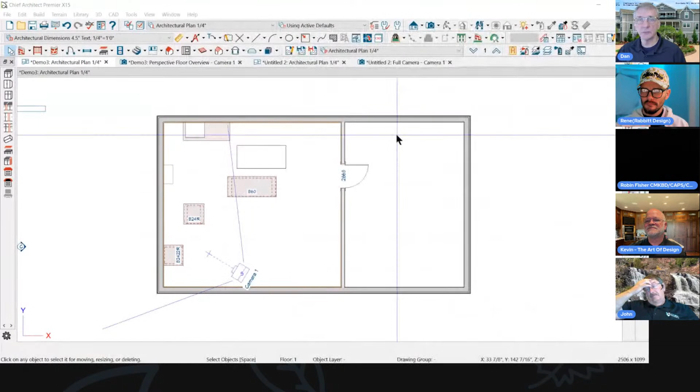So center cabinet hardware on doors, that's like just a couple new buttons. When you go into a 3D model, or you go into your cabinets and you click on the door drawer option, you'll see some new options here. One of them is centered - you've got centered up and down, centered back and forth. It's some new buttons to make placing knobs a little bit easier. So if you want those handles in the middle of your doors and drawers, just click those buttons. It's such a lovely aesthetic too.

Seriously, you guys, this to me is just kind of a silly button. But if you're designing, you already have these adjusted in your plan views. So to me, I would already have - I had to change my defaults to get that to work because it wouldn't work on my system.

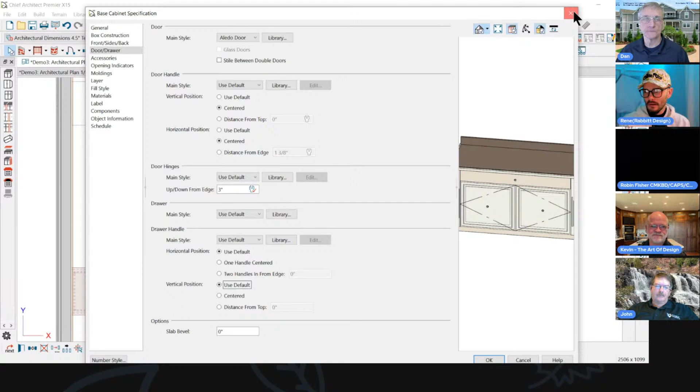Sure, okay, so there is a glitch and it's active and they know about it. There's some instances where the door handle offsets aren't working. In those cases, you'd go to your front, sides, back, and go to the door that's not working for you, and then go to specify under appliance door drawer.

One more one down, next one down, yeah. And now you would edit your offset here. So if you're having trouble with an offset, this one will work, if for some reason it's not working in the other general panel. Okay, cool, you've got 2 places to do it.

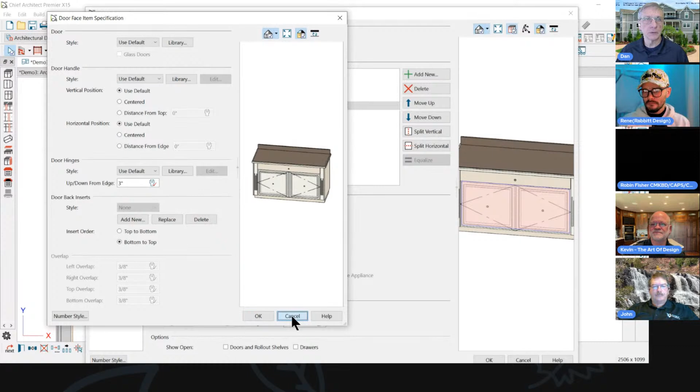And you could also set that in one only - this one does it for an individual component, right, it won't do it for the whole cabinet. Where the other one, going to door and drawer, will change everything on that cabinet. Got it, exactly, all right.

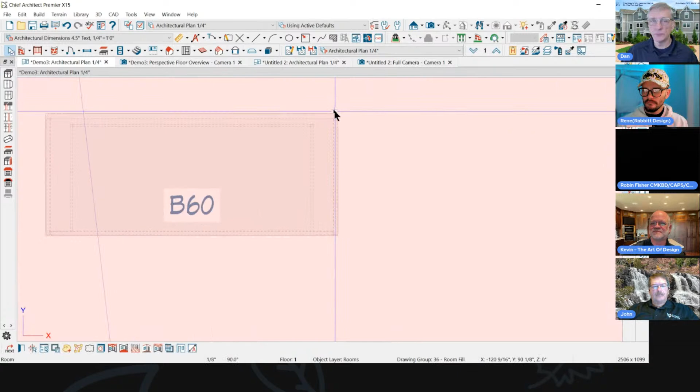Cabinet end panel display in view, plan view. So I put an end panel on this cabinet and it is displaying - it's also displaying the drawer. And that's set up in your default settings: when you click on the default setting wrench, go to general cabinet, and we can turn these buttons on right here.

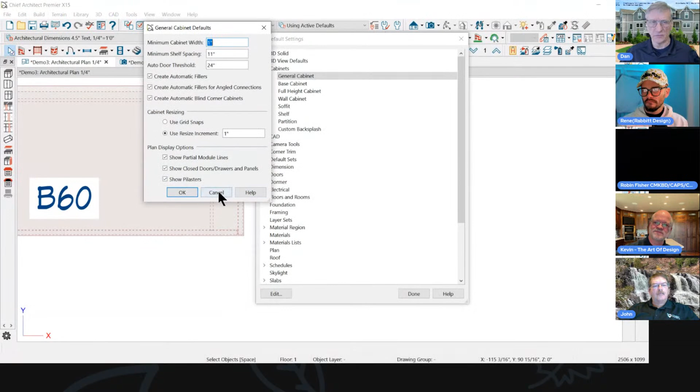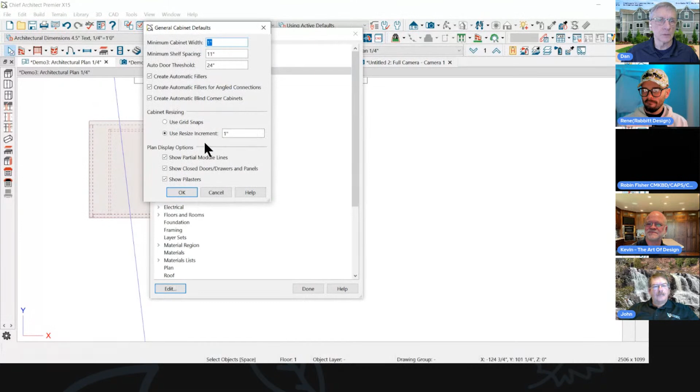Now, I played with those for quite a bit and it's like, this isn't working very well. What if I don't want to show my drawer here, I just want to show the panels on the sides of the cabinets? You have to uncheck the first one - you can't keep all 3 of them checked. I tried that, man, I tried it, and maybe it'll work today. I was showing it to my contractor, and he said there's so many lines on the drawing that it becomes confusing.

So, this is where it is. This didn't change anything. You have to look at this to be able to make sure all those little details that you need to show are on the cabinets. It's not something that you would necessarily share with a contractor, but you would share it with a cabinet maker.

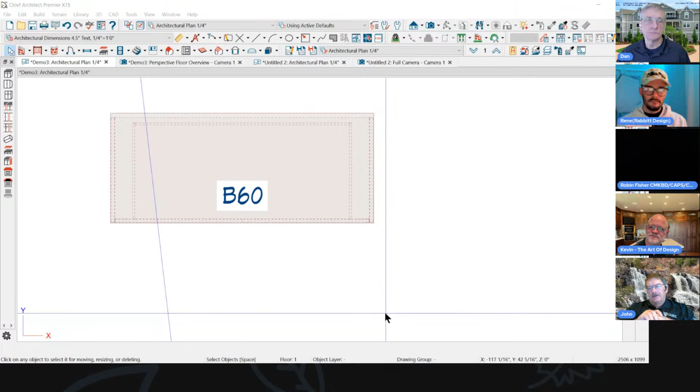But those aren't exactly the way you might make the cabinet, so is that really what you would show? It's showing that there's going to be something artificial there that's not really part of the cabinet. Well, I would do those notes on an elevation, because you're not giving your cabinet maker a set of floor plans. You're giving your cabinet maker all the details.

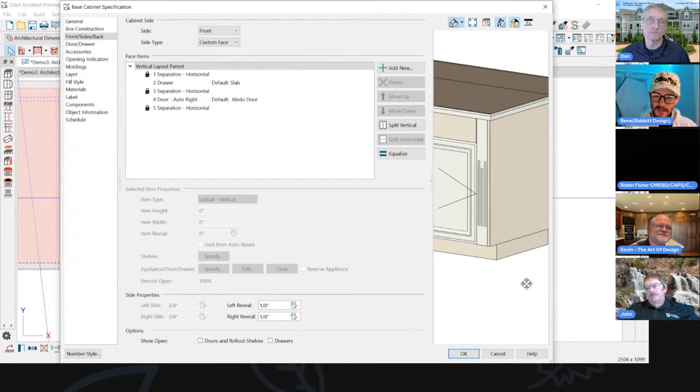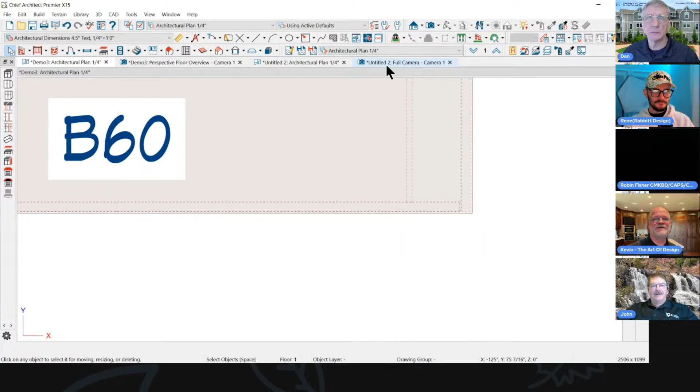Now, the other thing that wasn't working for me: when I put a pilaster on the cabinet and turned on show pilasters in the plan, this is what it shows. I can see it here, but it's covered up with whatever this front panel is. That'd be the door or drawer, I believe.

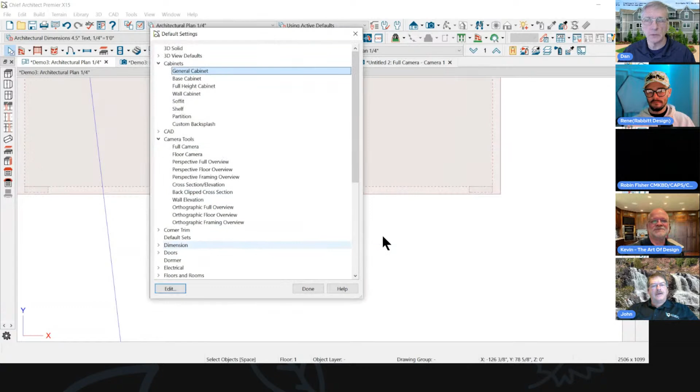I'm just bringing it up because it's on the list and I couldn't get it to work. That was under cabinets, under general. Even when I uncheck that one, now it shows the pilasters but doesn't show the side panels. Are the drawers in their own layer? I don't remember, I'm looking. I think that's a vertical, for when you're in elevation mode, but let me check if that's there.

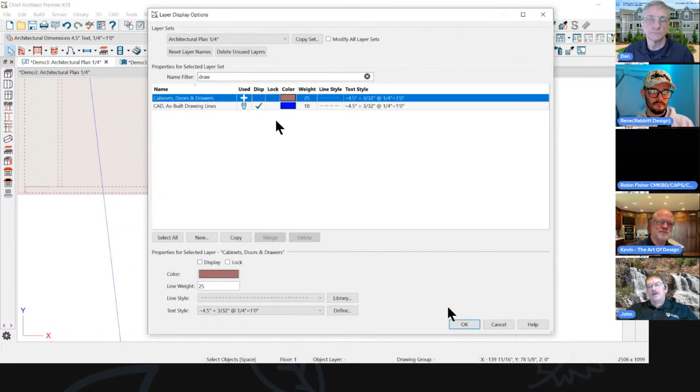I have to turn everything on first, right? Okay, I'll try one more thing and then we're going to move on, because I don't think this is something we need to spend a lot of time on. This kind of detail is fine if your cabinet maker likes it, but after a while it's too much information on your floor plans. So when I turned drawers off in the layers, it turned off the side panels too. Yes, it turns off everything.

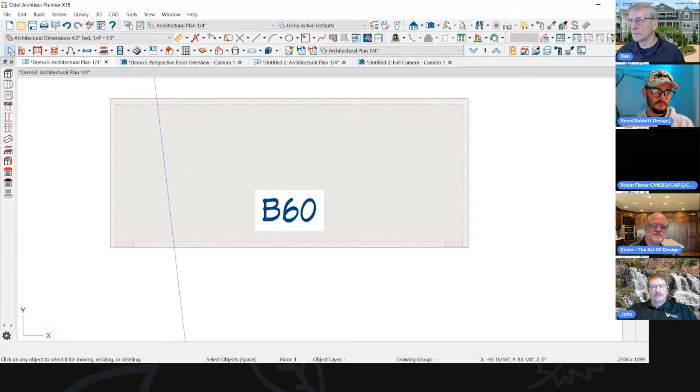Set pilasters is always present - I have no idea what that's for. Convert cabinet moldings to molding polylines: when you click on a cabinet, you have a new icon down here. So if you had put moldings on your cabinet that you had made and you want to turn that into a library object, you click this and it's going to allow you to do that.

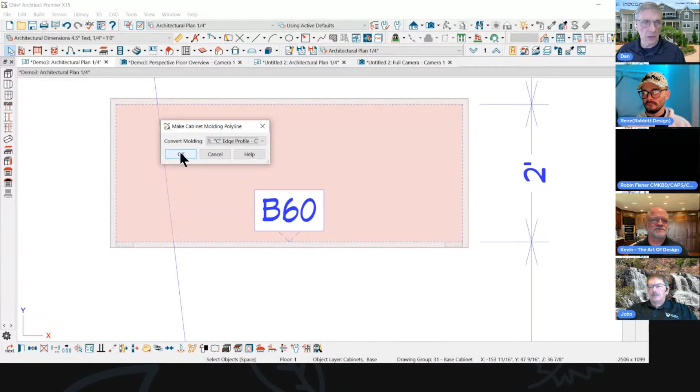It's really nice to be able to bring it around the side of something that might not exist, or to be able to move it. Rene, here's a question for you, I was showing this the other day to somebody - would you, I think it's kind of a neat idea, especially when you want to run it around the side of something or pull it a little bit farther so it finishes a corner detail up.

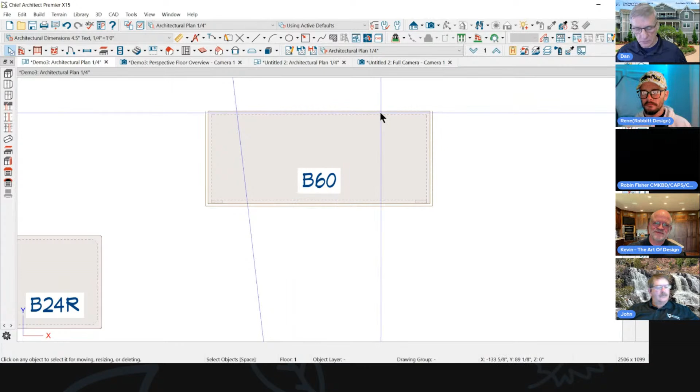Bringing it around the room, you would just change the room molding, unless you're only putting that on one. This is the molding I put on the countertop here. So when I click that button, it displayed the molding itself on the cabinet. I was using it for toe kick and baseboards, and I definitely find it very useful - I use it a lot. That one I like, yeah, that's a good one. You have control over if you want it on there or not now.

So it's a molding polyline, just like any other molding polyline that's attached to the cabinet, or in this case, the countertop. So it does. I like it. That works pretty well.

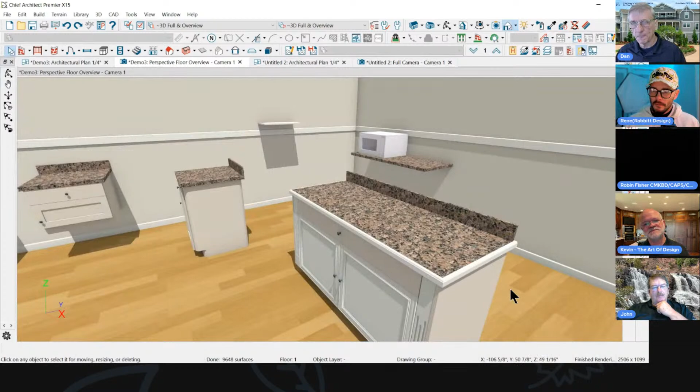So that's, you know, in this case, I'm seeing that molding going around this particular item. Robin, I'll give you a perfect use case for it. I've got a refrigerator built into a cabinet with a custom looking vent made to look like its real life counterpart. If you set a flat molding above that and set your molding to offset for any door items, for that particular item it's going to offset to that vent I created instead of offsetting just to the front face.

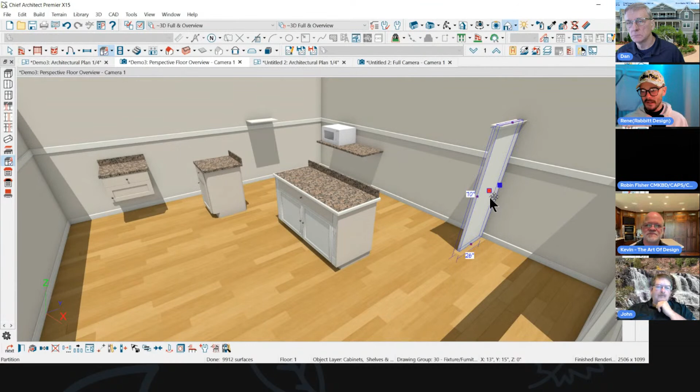So then I convert it, adjust it, fix it. There we go. It's also nice, like if you're going to continue crown molding over a certain part of a room but not run it everywhere, you can detach it and turn it into a polyline. You can drag it to the wall, right? I'll also say it's a lot easier to use in 3D.

Yes, which it is. I do a lot of 3D design now. Yeah, I started doing that, Rene.

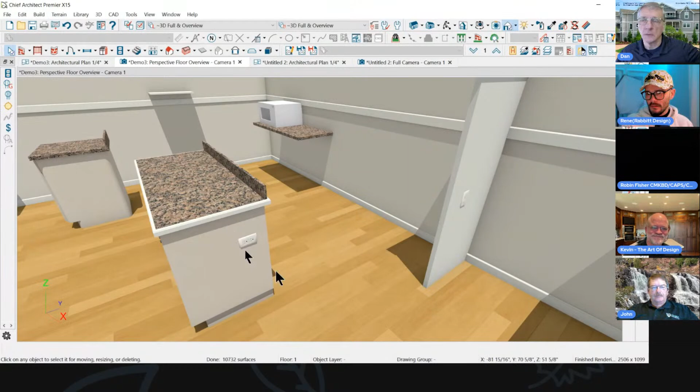I got a trick for you, Dan. Rene guru, you see that outlet right there? Which one, that right there that you just placed? Yep, this is why I love that we have symbol modification in the object itself. Open that up. Oops, wrong one. See how round that is? How round that cover plate is?

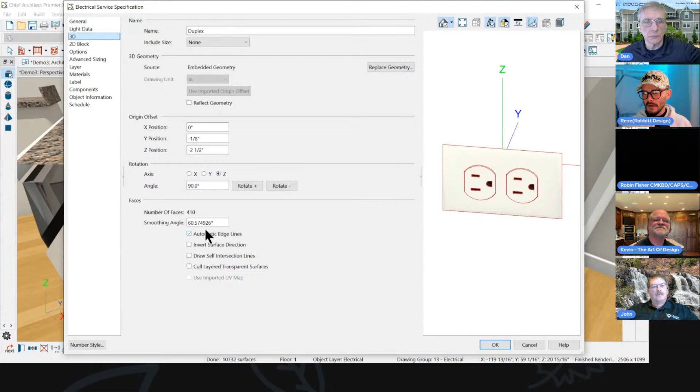Go ahead and get to your 3D panel and set your smoothing angle to like 12, down at the bottom where it says 60. See, right now it says 60 under smoothing angle. Oh okay, thank you, the last input box. Change that. Yeah, there we go, and it just beveled it. Now press OK. Bam.

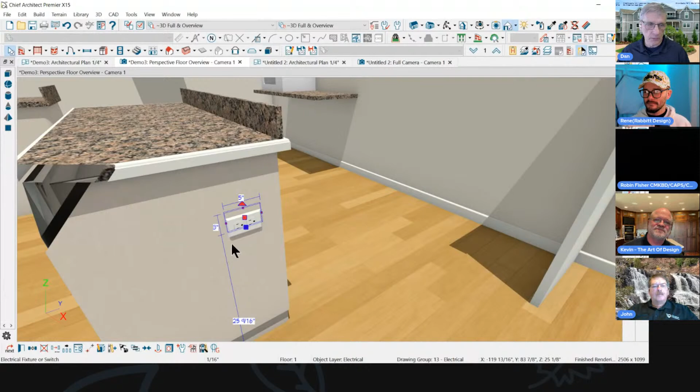So easy. We didn't have to go open the symbol dialog and change the 3D symbol. It's all part of the whole object now. Of course, something's a little bit off here. When I rotated it, it's not quite where it should be, but let's not get into that right now.

So again, the new features, we can add these into partitions, and then we can also in our partitions, let's see, what is that? Select next side. Yeah, they decked out the backside just like they really would.

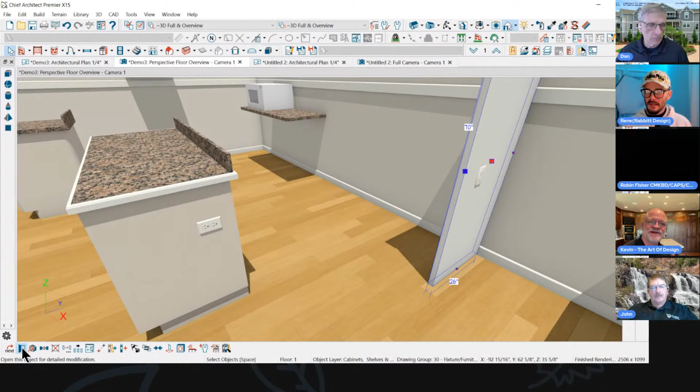It doesn't work on walls though. I wish it did. But we can put toe kicks on or off with our partitions now. Oh, that's quick. So that's kind of nice.

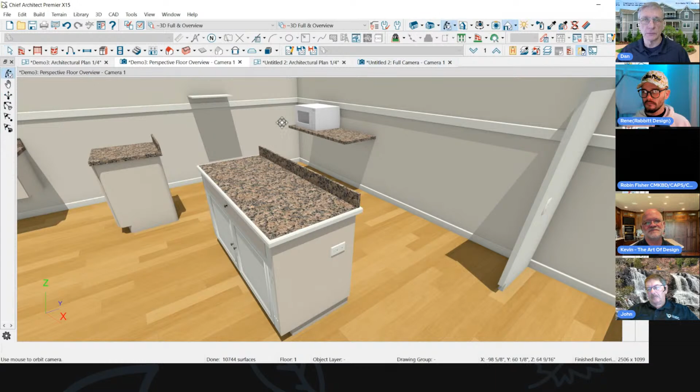And what was the other thing? Place items on a custom countertop. So if you have a custom countertop and I just placed a microwave, it set itself right on top of that countertop. I guess I'd never really noticed that before if it had done that or not. So apparently it does. It didn't before, because it's a new feature.

All right, so that's all I got in the cabinets.

And Robin, we got to check that internet out, so for next time we can get you on here. All right, that's okay, not a problem. We're remodelers, we're used to just figuring shit out all day long. So it's what we do.

Oh, and suppress the moldings behind design objects. That's really great for like an open table, if you're putting furniture in a room, like a table against a wall, you could suppress the molding if you wanted to. Yeah, I couldn't get that to work either, so I'm not even sure. I tried it with cabinets, furniture. It did work with furniture. I take that back, so I guess it was working.

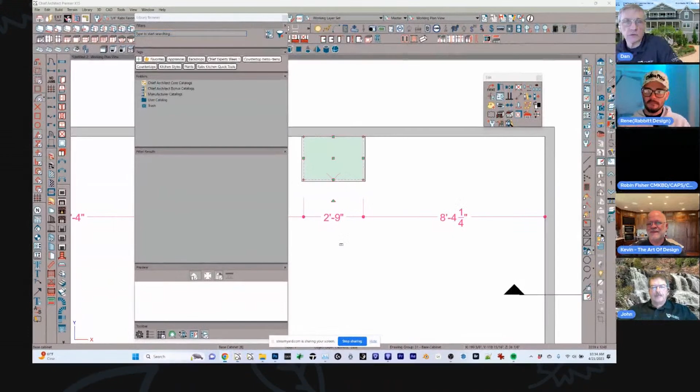Anyway, Renee, let's switch over to you and let's talk about this new library browser for a minute, because I get a lot of clients commenting about it. They don't like the new library browser, and I just tell them, once you get used to it, you're going to love it because it really is nice, and I do love it. It's so good, it really is good.

We had talked about this on the first show, and I think it's just one of those things worth talking about again. We are going to get an update next month that's going to fix some of the problems we're having with the subfolder view.

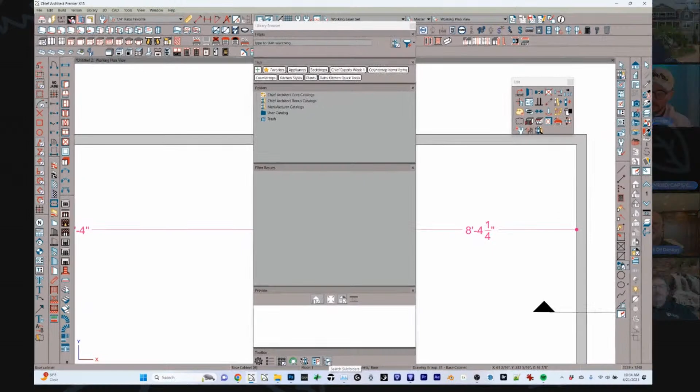There's some problems there. I don't even know if it's worth talking about those particular problems.

First up, tags. Tags is a great feature. You can multi-select any number of items that you might have in your library, like I've got a few tiles here now.

So you're holding your control key down to group and select a few things in here, and just add some tags to them. Let's just show how you add a tag.

I'm just going to right click on this item and get down to tags, and then I can click one that I've already got here, or I can click on manage tags. I can just start typing in tile, for instance, and it gives me the option to create a new tag.

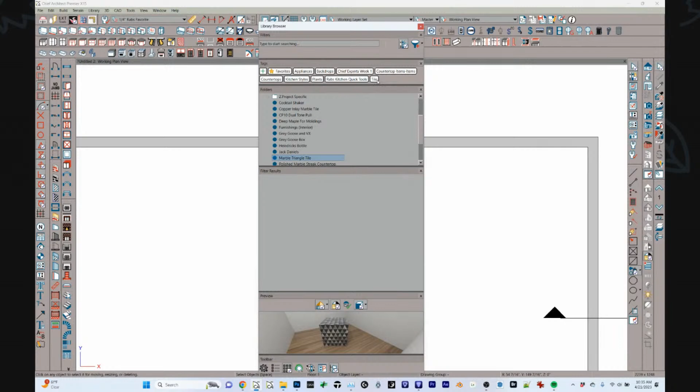Named tile, there we go. And I'm applying that to this particular item, and now it's up in my tags at the top of the screen. So when I click on that, it adds it as a filter.

Anything that you see up in this corner is a filter. So we're filtering results based on these filters, and these filters do in fact stack, so that if I then click on appliances, it's adding an additional tag. It won't remove that tile tag until I click on it and uncheck.

So a couple things, once you know how this system works, it becomes very powerful. It's very easy to find things fast, very quickly.

I'll give you an example. Maybe I've built out a kitchen and I want to place some things on top of the countertop. I can type in 'sits on' - look at this, it comes up with this designation.

Now this is no longer just a text search. We're actually doing kind of like a classification search, if you will, or a type search, which is I'm looking for specific items that sit on a base cabinet.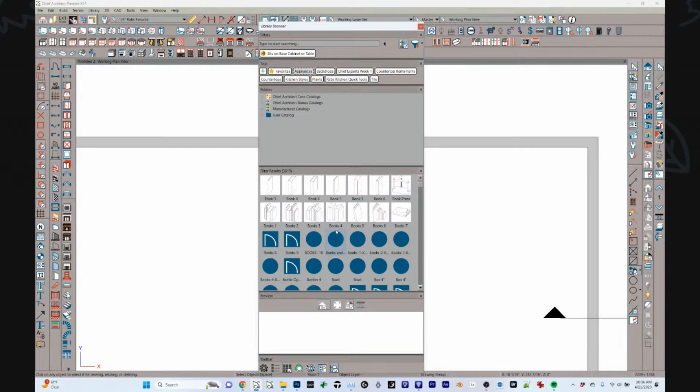That are designated in their options panel of their symbol classification that they sit on top of a base cabinet. So we can get to things very quickly.

Maybe I want to add in some additional info like sink. Well, since this is a symbol type, this one will in fact take over the previous type, I believe. Oh no, it stacks - look at that. So now we have stuff that sits on a cabinet and happens to be a sink as well.

Explain to everybody what the ones with the little globe on it are all about. The globe here means that these are catalogs that you don't have downloaded into your system. These are online based catalogs, and it's simple enough to right click on one of these items and go download catalog, or simply try to drag and drop into the scene and it will automatically download.

So this is some catalogs like the Kohler catalog. It's a large catalog, so you have to be patient because it can take a while. Yeah, some catalogs will be like poof, so you just have to be aware that it is working.

But you do have to have that option check marked up in the upper right corner of that. Yeah, so this option up in the right hand corner. This right there, include web results.

Keep in mind, a few of our users have slow internet connection speeds, so you might want to have that unchecked when you're just casually browsing through your own stuff. Then it won't show those.

Show that one where it says Chief Architect Core Catalogs. It's got the double arrow on it at the top of your list. Yeah, so if you see this icon here, it looks a little different for some reason. Oh man, I got to work on my penmanship.

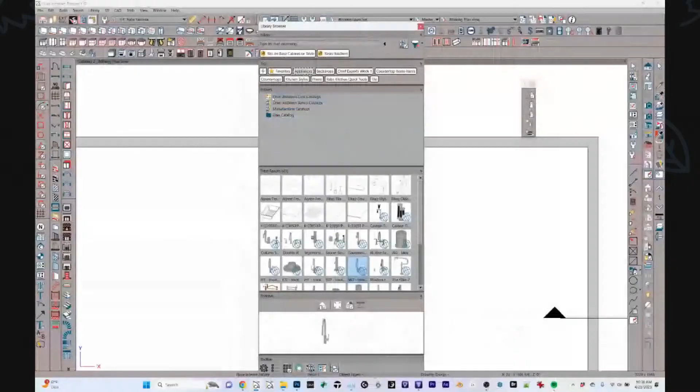That means we've got some updates here. Something needs updating. If I close these out, it might show me which one. No, it just shows me I've got some updates. If I right click and click on update, there we go. It's going to download those updates.

Chief is constantly fixing, adding, and changing things in all the libraries they produce. So when updates are available, you just click it and it'll download them. That's really nice because you don't have to remember it anymore. Now you can see it.

I'll just talk about some filter stacking, if you will. It just becomes really easy to find exactly what I want. This shows me those catalog updates were updated successfully.

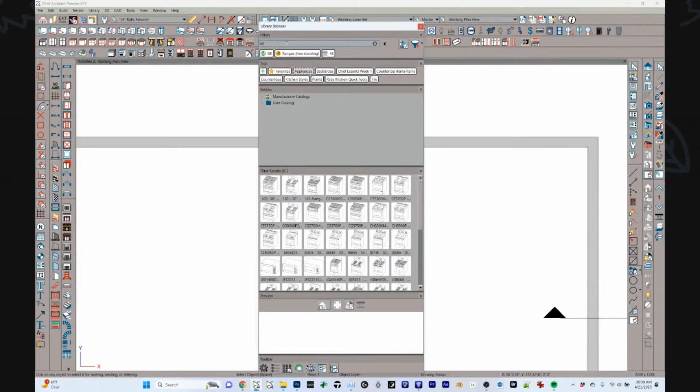I'm going to type in GE, and if I scroll down here, you'll see at some point the manufacturer GE. So I'm filtering by manufacturer GE. Now if I go look for a range, I can look for a symbol type, standing ranges. And now I might do a text search like 48 — this might be looking through search attributes associated with these. So you can see here very quickly, I got exactly what I wanted: a 48-inch range made by GE.

That's fast. Cool. Somebody commented a little bit ago — GMP Builder commented, 'I hated the new library functions at first until you guys explained how they are useful.' A little understanding goes a long way.

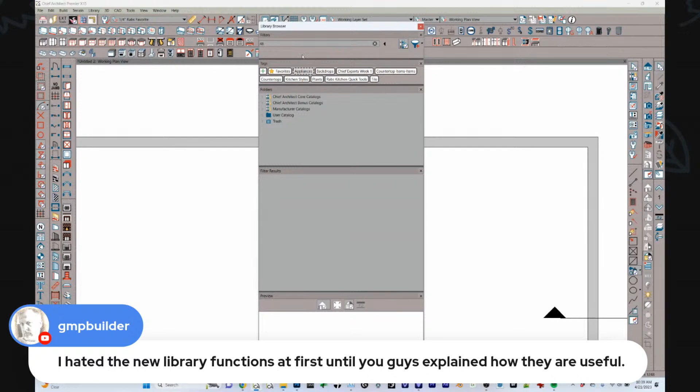I know, Rene, you didn't even like the tags at first, and look at you now. I've got them now. I've found that even though they're hard to see sometimes, they're still faster to me than trying to think of what I was trying to search.

So Rene, are the tags already on library stuff that came from the catalogs? Do those already have tags, or do you have to place them yourself? I'll tell you about the next update — they're giving us the ability to pass on tags when we export libraries. Right now, you can't; if I export a library, it will not carry the tags I added. Next update, we get that.

Also, next update, I'm promised they're introducing — I'm hoping I'm allowed to say this, I think I am — a method for group editing of search attributes. I think they've even improved on what I suggested. The team there, that's really interesting, I'm excited to see that. And then they'll be fixing the subfolder issue.

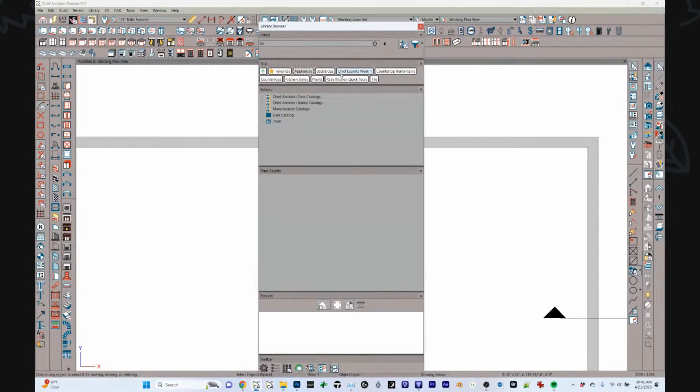So can I just clarify this? You were looking at a range — do you have to go big to small? So you were looking for a GE range: you typed GE, then typed range, then typed 48. Do you have to go in that order, narrowing down?

No, you don't. You could write 48 GE — you could go in any direction. It's just adding a new filter to the results. And mind you, anytime we click on a folder within our own system, that adds a filter too. You see at the top of the screen, that just added the filter for this particular folder, showing me what's inside of it.

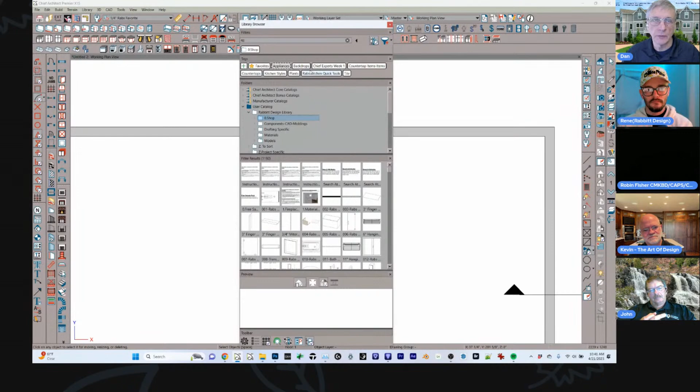And then once you create a search like that, you can click the little funnel icon in the upper right corner and save that search for future reference. Exactly — so we can do some advanced things here. I'd encourage you to go play around with that.

That seems pretty straightforward — if you go into the advanced search filters, I can drop down and get into those filters. I have some tools I call painters, and with one click for that filter, it immediately brings me up to the filtered result. Versus tags, which are just kind of arbitrary — you place them on whatever items you want. So it's just a different approach.

Rene, in the library — I agree with Mark on this — on my screen, the library items are so light gray that I can barely even tell what they are. Is there a way to darken the images?

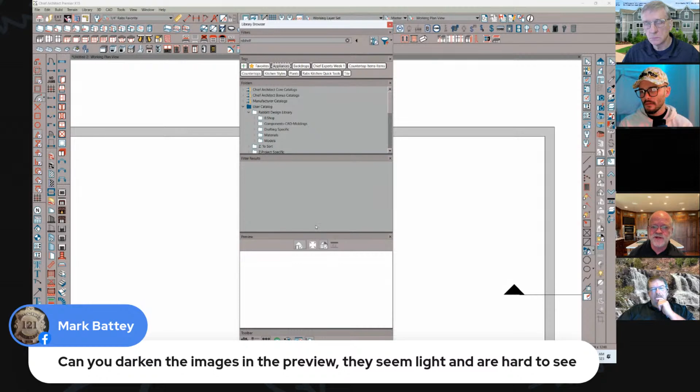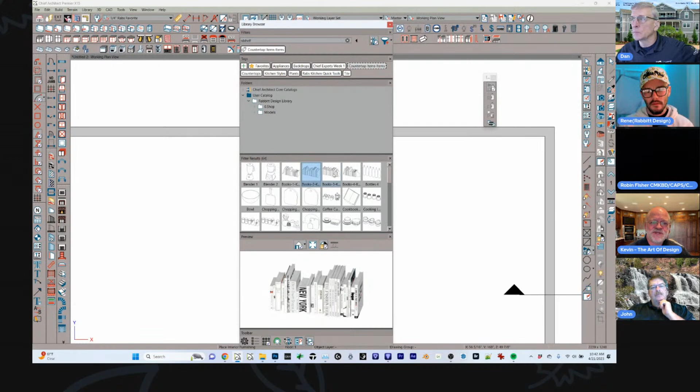If we're just talking about the color that I have applied... no, the preview when you select an item or find results, a group of items in the library. I'm not talking about yours, I'm talking about even on our screens individually, but the items can be so light that you can't see them. Is there a way to darken them?

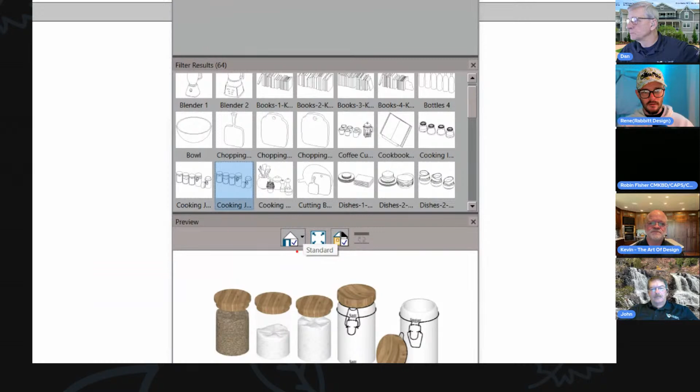Oh, I don't think we have any way of adjusting that. I do believe the preview comes from your room default or your floor defaults. I can't remember exactly what the room preview comes from, but you could always change it. If we look here, just changing our standard rendering technique options, this guy right here, we can mess around with that a little bit. You might want to try something different like the vector view.

Maybe that's helpful. Maybe Mark was just asking you about this presentation. I was thinking about what you're seeing there and how everything just disappears.

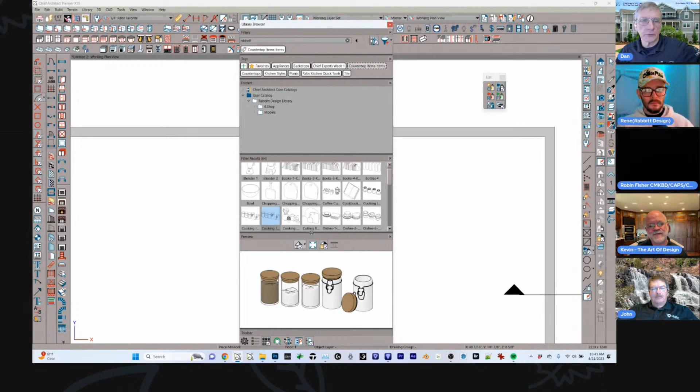But yeah, maybe vector view is a better look, easier to see. I think what they're talking about is when you click on the icon down there, the bunch of dots on the bottom that show the one next to that. Well, I'm talking about even in the grouping, the center show the thumbnails. Third icon from the left is the one I have checked right now.

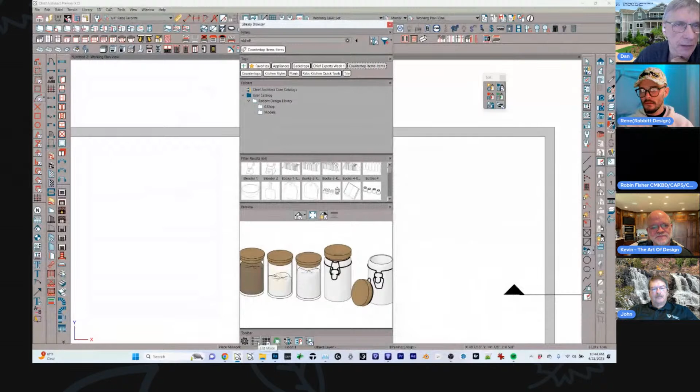Yeah, okay, and then you see that list of items up there, and everything's kind of light gray. Yeah, so it's kind of hard. We're talking about this. Well, you can control and mouse wheel up if this is helpful, hold your control key down and mouse in and out. Yeah, that's helpful. That is helpful, actually.

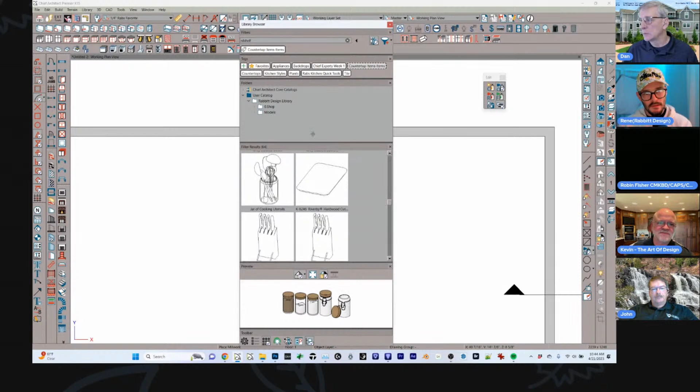Oh, that's under tags. And then if you mouse cursor over a division in these tiles, we can always just expand this up even larger, because it seemed like we used to be able to view those items in color. I don't think we do that anymore, now it's all just vector lines. Well, the preview will show you in color, but not that panel.

Yeah, so okay, I mean it's fine. Filling up a 27 or bigger inch screen with just your library panel would probably help too. So this comment right here, light fixture glass is very difficult to see. I would just change the rendering preview to a vector-based view then.

So Rene, when I'm typing in the tag situation, I'm going into tags and I typed in 4 different things and it's not showing anything. It's showing, I asked for a 60-inch range and it's still showing me a 30-inch. What am I doing wrong? So I just typed it in under tags.

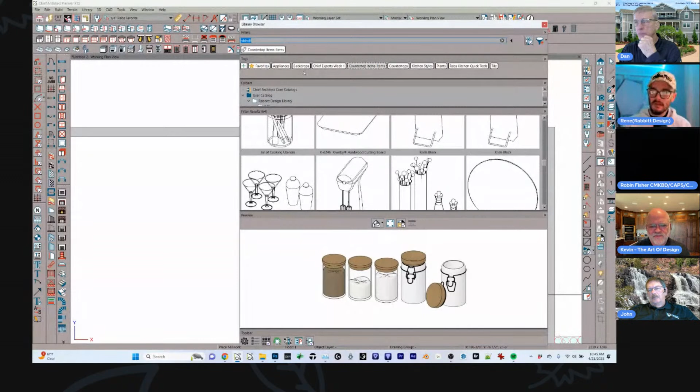Well, so tags are something that you designate, right? Oh, I see, got it. Something already has to have a tag in order for you to find it. Okay, right, so you're going to create a tag and apply it to an object. The other thing is the object has to have that attribute. Okay, that was the question I asked.

So the Chief's catalogs or the manufacturer catalogs don't have tags added to them yet. They don't have search attributes or tags. Well, some of them do have search attributes, but none of them have tags. I get it. So as those get updated and as we find our regulars, then you'll be able to find them. Now I get it, okay, thank you.

So I'm going to show you one more thing here, one more thing, and then we're going to move on. We've got a move to folders option now, this is a big one for people. Move to folders. Say I want to actually make a duplicate of this item.

Well, I can search. I'm going to throw this into the section that's to sort. This is showing me actively, searches throughout my whole catalog here. Now, when I click on this, you'll notice that the user catalog is checked, and so is the to sort folder. You can see they're both at the top as filters.

I'm making a duplication if I press OK right now. I'm putting a copy into this to sort, and I'm leaving it where it was in the user catalog. I'd have to uncheck this if I simply wanted to move that item.

So we can make multiple duplications of items on the fly if for some reason you want them in multiple places just based on your file organization. But this also helps us move large groups of items into a folder very quickly. Nice, yep, all right, go ahead.

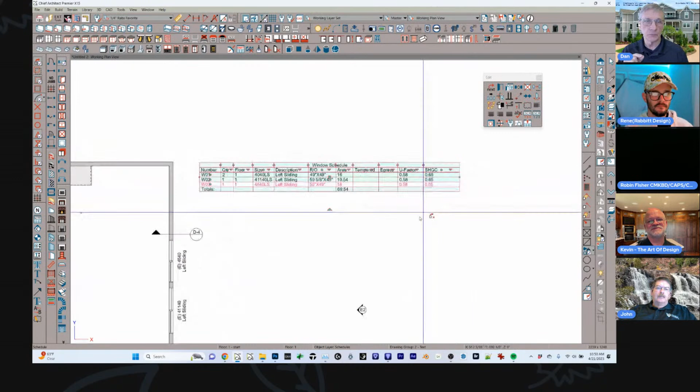Oh, and I suppose it helps if we have some windows, different size windows. Now you can also on your schedule say do a separate schedule item for each window, even if they're the same. That's a setting I noticed there, and that's kind of nice too.

Well, that's always been group similar objects. So group similar objects, we'll split that up so you're making sure that you're not grouping together items, especially if you don't have something like the floor column included, where maybe you have windows on a first floor and a second floor, and you don't need to show the floor column on your schedule, but you do need to show those are different windows. You could do that by unchecking group similar objects.

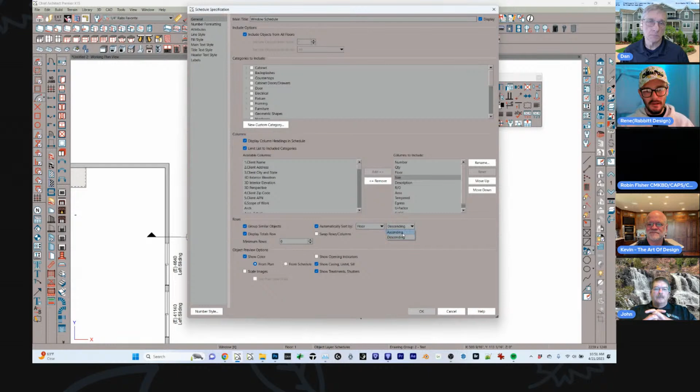So we've got this option here, automatically sort by. We can check that and then pick a column, any column that you want. So maybe I do want to sort by floor, ascending. And if I press OK, there we go - now we've sorted by the floor number, even though I don't have a second floor in this project.

No, I get it. So that's where you do the sorting - you don't click on the title of the column or anything, you do it in the dialog box.

A couple versions ago, or maybe one version ago, we got swap rows and columns. That's helpful if we want to make a schedule be something that's not a traditional schedule, like an electrical panel schedule. We've got so many options now, we can really make a panel schedule look accurate nowadays. So that's kind of cool.

Minimum rows - this is a great one if we want to increase the minimum rows here. I think they were getting a lot of requests for this. In fact, this is something I would have requested at some point, which is if we've got a page full of schedules, we want those schedules to look uniform across our sheet, regardless of the information there.

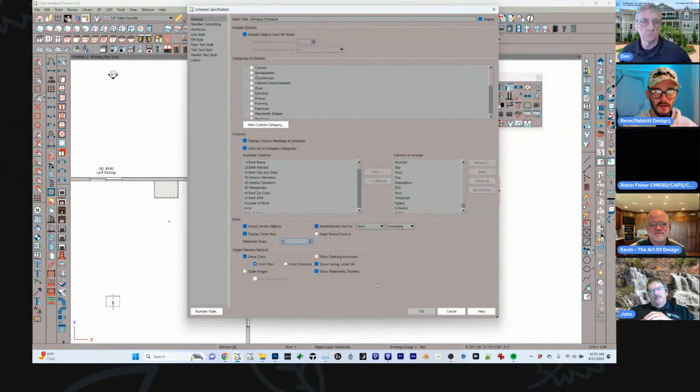Well, we can set a minimum rows to be whatever the maximum number of rows in one of our other schedules is, so that they all just look the same across your screen. So if I just type in 12 here, it's going to ensure that I've got 12 rows here. So if I had a separate schedule here, this just means this is the same uniform look across these two, right? They line up.

So is that going to put double callouts on your plan again? Oh yeah, this will. But I don't display mine. You know how to get rid of it. How do you get rid of it? It kind of gets rid of it, but it doesn't get rid of it. If you uncheck call out numbers for one of the schedules, it won't give you doubles.

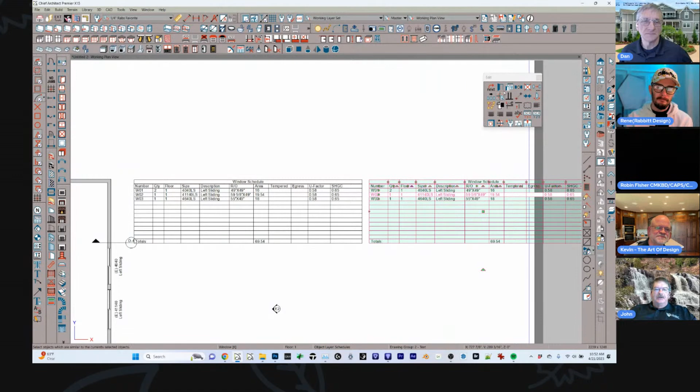If you use the label for the number instead of the call out, you have to change up your schedule a little bit, but then it won't be displaying the double numbers. Gotcha, double symbols. All right, cool, that's good to know. Another thing, if you have one schedule saying label and the other schedule saying call out, then you'll just get one of each. It's something that people need to play with to see how they would want to use that.

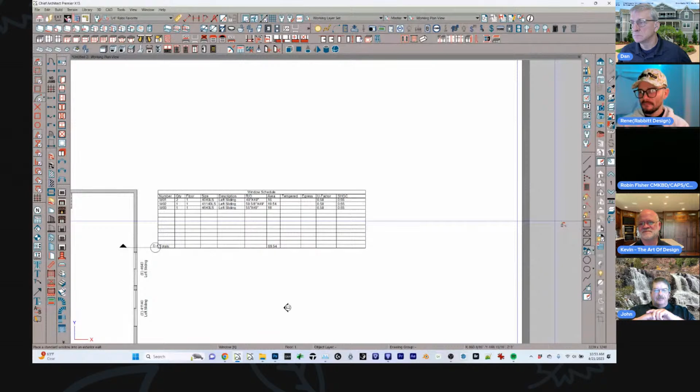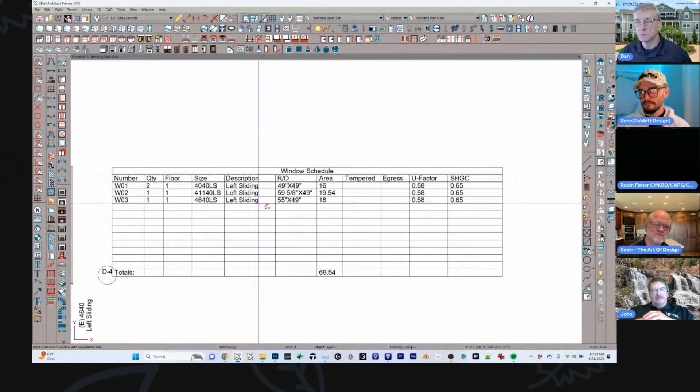Got it. The other trick is to put your schedule in a CAD detail so that you can put that on your layout multiple times and not have to have duplicate ones. Oh no, you'll still get duplicates when I put all my schedules in. I have all my schedules. If you put a schedule in a CAD detail, it will still duplicate.

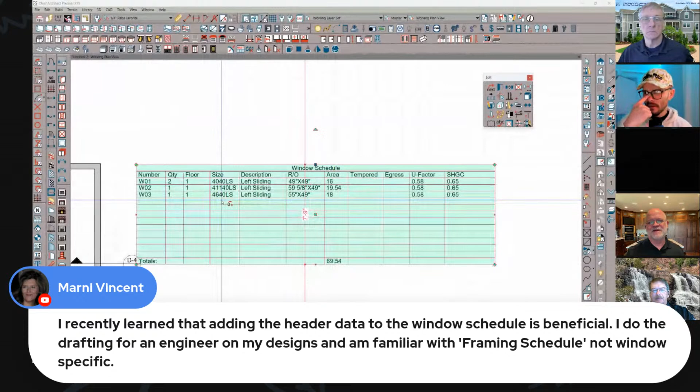I don't know about CAD block. You can't have it on your plan at the same time. Yeah, only in your CAD detail. And then you can place that CAD detail several times on your layout, and it won't duplicate. Gotcha. All right, so we got truss preview and schedules.

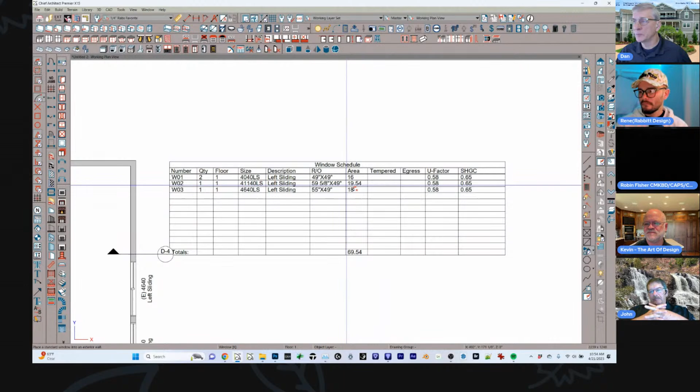Okay, so we would need a truss schedule. Let's see, is that a separate schedule? I think that's just part of framing, I think. So that's going to be one of those items on the list that we can add to a column, I think. So if you open the dialog for that...

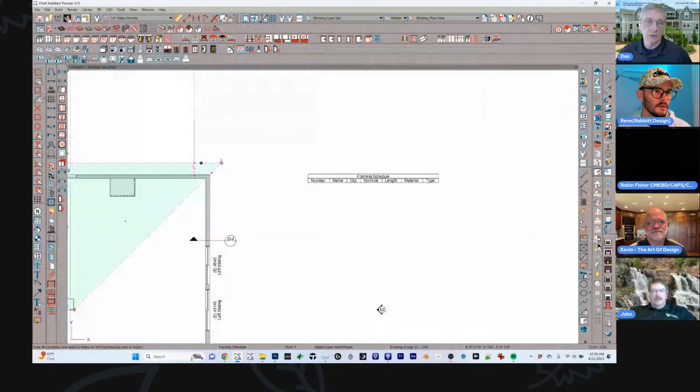It'd probably be like displaying windows and cabinets and things like that on your schedule. You can have a row for the 3D or 2D view of it, would be my guess. I haven't even looked at it yet. Let's see, we build all framing. Go. And so now I've got a roof truss here, and let me...

What would be the truss preview? Let's see, elevation. I would think it would be an elevation, wouldn't it? It's not listed as a truss there, and I have not done this yet. No, so I don't see sloping flat truss. Interesting, no, that's not going to give it to me. I don't know what the 3D exterior elevation would be. Probably it.

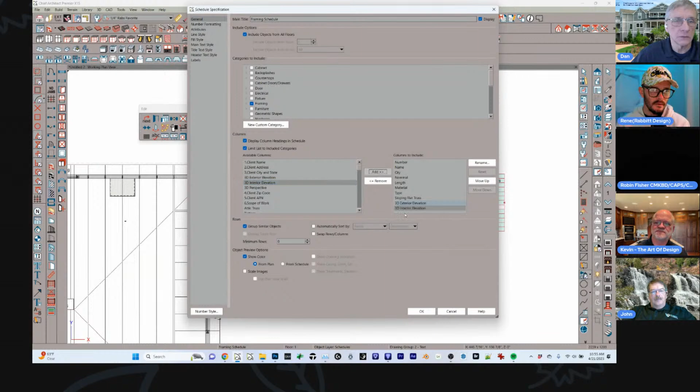There we go, there's your trusses. All right, so of course I've yet to create a list of trusses that are accurately drawn, but by golly, we can show it now.

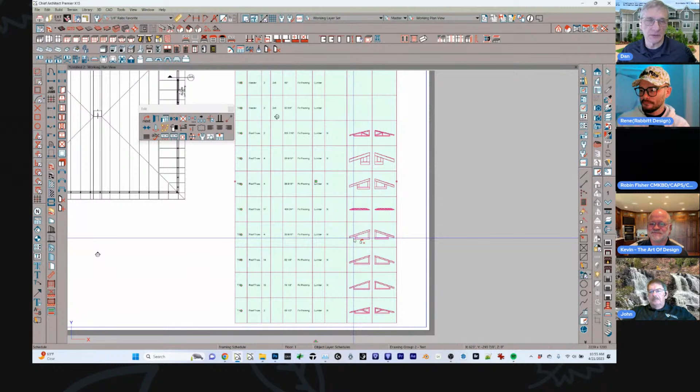I'm not sure why you'd want to take on that liability. I'm just going to hand it off to the truss company. Exactly, yeah, so it's nice to have a conversation with your truss manufacturer based on that. I do lay out trusses for that reason, because I've had some projects where my thought process went and the truss guys agreed with me, and I've had other ones where they said no, we're going to do it like this. So it is good for conversation, I do like that.

Make sure when you're printing that you set up a watermark, is what I would say if you're going to do that, trusses per manufacturer, or always trusses per manufacturer.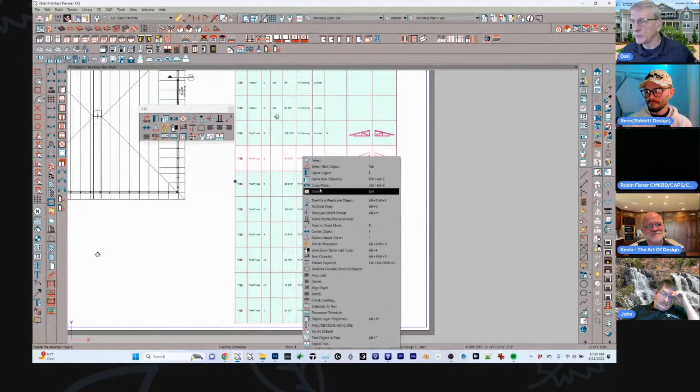Room volume and schedules. Okay, so that must be another one on the list. So if you have, I wonder if that's a room finish thing. So would that be a room finish schedule? Yeah, I have an area interior. Yeah, that's probably it.

And I see they have a percent wall opening, we have volume in schedules. Those things are all going to be nice for doing your energy calculations and things like that. Yeah, there you go. And just if you want to see totals, make sure you've got the totals column selected when you're opening up your schedule. We're just going to show, make sure that you've got display totals row, if you want to see totals tallied up.

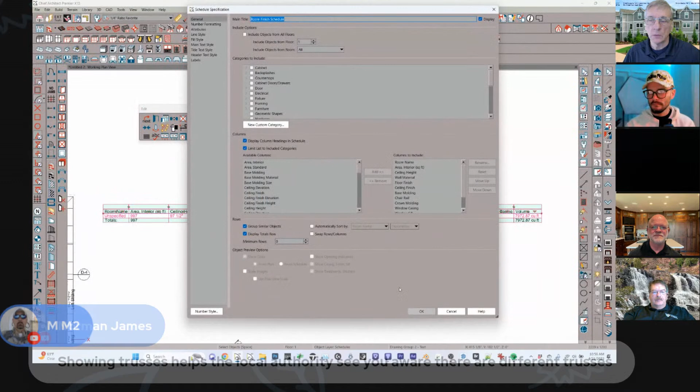Mike wants to know, can we do watermarks per custom per sheet? Not that I'm aware of. I think no, you'd have to print individual sheets then and compile them in an editor. You can create a watermark layer and use it as the different sheets, but it doesn't quite work the way the watermark does. You've got to deal with transparency and background printing and all of that. You might be able to do it if you had multiple ones that made sense by making a new template page for your layout. True, but what a pain in the ass that would be. Well, I'm just saying, just for a watermark? Might be an option, that's a great option I think.

Yeah, we won't get into that right now. All right, we got a few minutes left.

Cabinet doors and drawers in a schedule, header height and windows in a schedule, we don't have to show these. Symbol information in schedules: use the type column for symbol-based objects like fixtures and furniture. You can group edit schedules, so if you have a bunch of schedules, you can open them all at once and probably edit some things.

Hey, want to talk? That's an AI one right there. One of our users is developing a system to take the type. This is why Chief did this. They're offering the type so that you can export your schedule to an SQL database and have it automatically order based on that. So that's like a 3-click thing to an order form that's actually submittable to your vendor, which is pretty impressive.

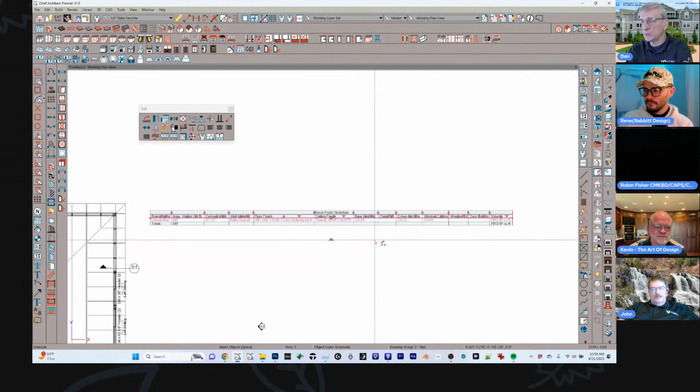Hyperlinks and rich text. I think we're done with the schedules now.

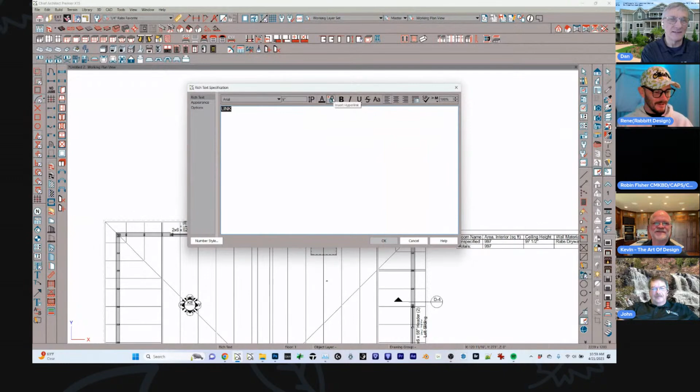You want to show that real quick? Oh yeah, I love that one. That's a new one, so forgetful. We had hyperlinks in regular, in plain text, but now we have it in rich text as well. I forget everything under the sun, so it's nice for me to come in here and go link, get reminded. Link, highlight it, and then click on this guy right here, insert hyperlink, and you get to type in some text like this.

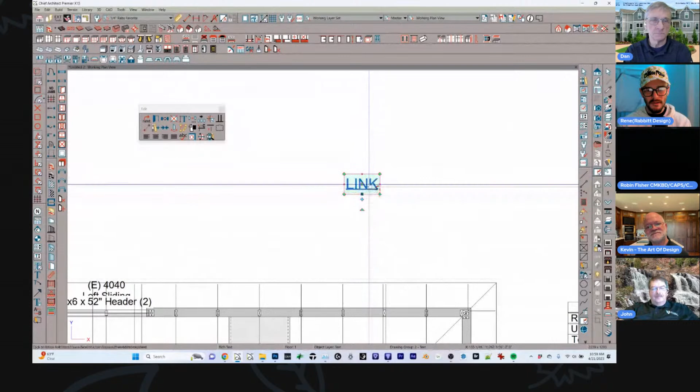I wish I had this show on deck. Oh, I know what I have, I have my Facebook group right there. Press OK. Now, when you actually click on the text itself, you're going to see here when you hover over the text, my mouse cursor changes and I can actually click on that link and it's going to take me to the page that got linked there.

Did you just click on the link itself? You didn't have to click another icon? No, didn't have to click on another icon, which is awesome.

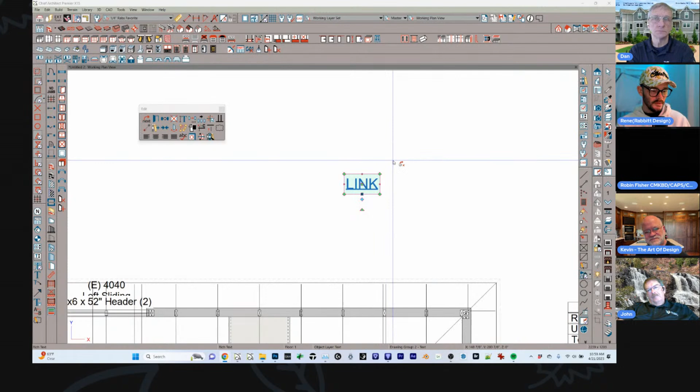Now, the other great part about this is if we were to print this, it's going to make it so that it prints with the hyperlink embedded in your PDF. Not if you print it on a piece of paper, you won't be able to push the paper that way. But that's helpful if you want to embed a link, say change your draw order, put the link underneath a call out, and now you're making a makeshift way of linking to a page that you've got embedded in your website that the call out pushes to. So you could click on an elevation call out and have it go to another sheet if you're embedding that in your website. That's pretty tricky.

Is there any way to put a link in a schedule? No. Like for your appliances, you could put a link there to the installation instructions, that kind of thing. You're going to do the same thing, which is change the draw order, put your actual text link underneath the schedule, and that will work. But not in the schedule itself. Someone said awesome for QR codes. There you go, yeah.

Fill transparency for call out arrows. You set the level of transparency. What's that all about?

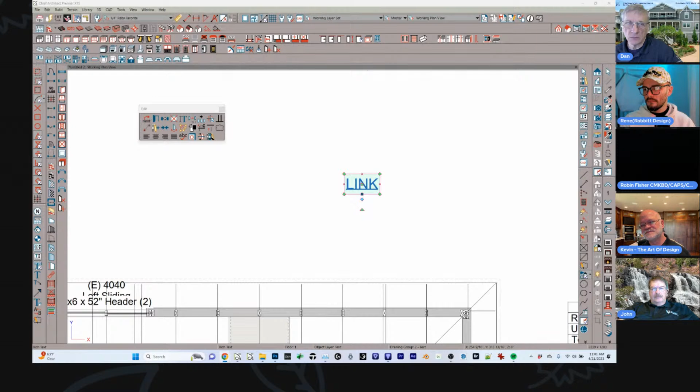Haven't used that. Why would we want to do that? Well, just so I got a callout arrow. I believe I have a callout arrow here. Actually, that's what that is, isn't it? Just depends on if you're using some kind of custom arrow.

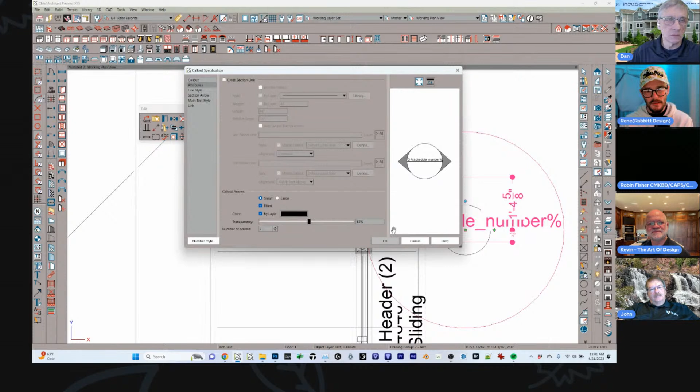I don't even remember how to do this. Let's see, 1, 2, 3. There we go. And change that transparency. Oh, okay, so maybe it's not blocking some text or something like that. Yeah, I guess I could see that. Yeah, if you got a bunch in one spot, that could be an issue. And if you're using custom arrowheads, I think we talked about that once.

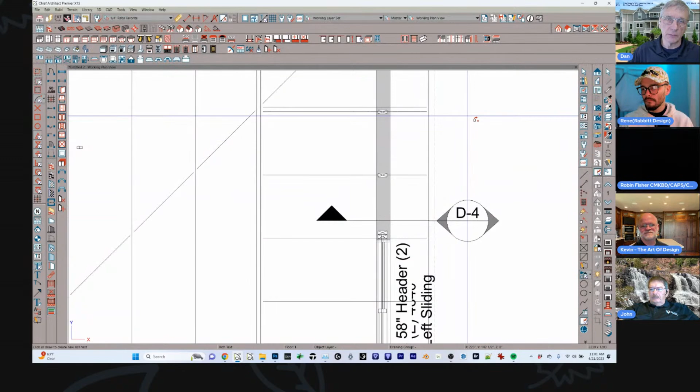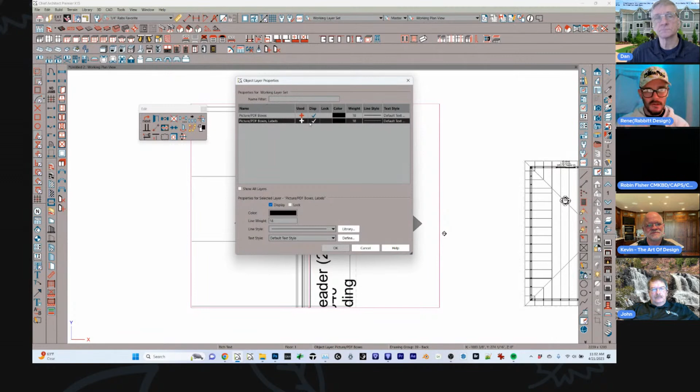So yeah, we got labels for CAD blocks, pictures, and PDFs, so we can label those kinds of things in our plan now. So anytime you import anything, it can have its own label displayed under it, just like any window label, door label, anything. So now this is on its own layer, and it can have labels. Just keep in mind that by default, some of my template pages now have PDF labels turned on, and I actually don't like that. So if you're using a template, you might notice that this is turned on, and maybe you don't want it turned on.

Special characters and macro text. We won't get into that right now. Designer client information dialog - that's been there forever. What are they changing about that?

It's associated with your plans and macros now, so that's under the tools menu. Yeah, I haven't noticed anything different. I haven't either, unless they're just linking it to more things, which it seems like. So maybe they've created more macros that you can link these to other places more.

Does it link from your layout to the plan that's referenced on it? No, not that I'm aware of. They did change something, but it's still not quite there yet, I don't think, because we have no way of pulling that information up and having it report to us some kind of macro that we want. So cool.

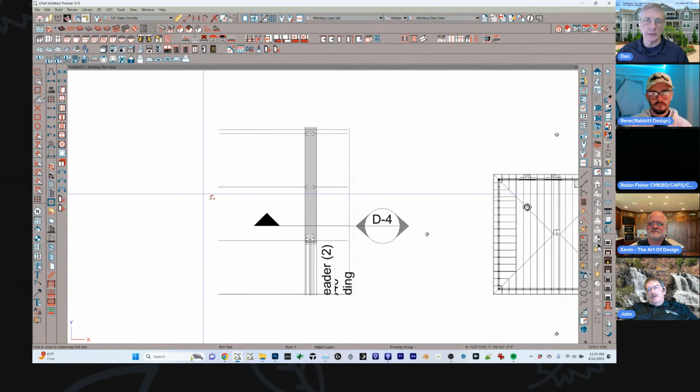All righty, I think we're about done here, you guys. Very cool, good stuff. I hope that was helpful for some of you guys to see some of those things, especially the library thing. That's why I wanted to show that again, because that is such a time saver now. I used to search a couple minutes for a stupid kitchen sink. Now I can find it instantly almost.

One more thing on the library. Renee, can you go back and show, if people want to use it the way it used to be, how you get your library to look like it used to? Well, we don't quite have that option, but by using the folders you can just turn things off. Right, oh okay, so just hit the gear icon there.

Yeah, you can take out tags if you want to. A couple different things here - the subfolder icon here, I wouldn't even go over it yet because it's not fixed, it's broken right now. Yeah, so right, but just by checking those options under the settings, under the gear icon, you can get it to look like it used to in past versions.

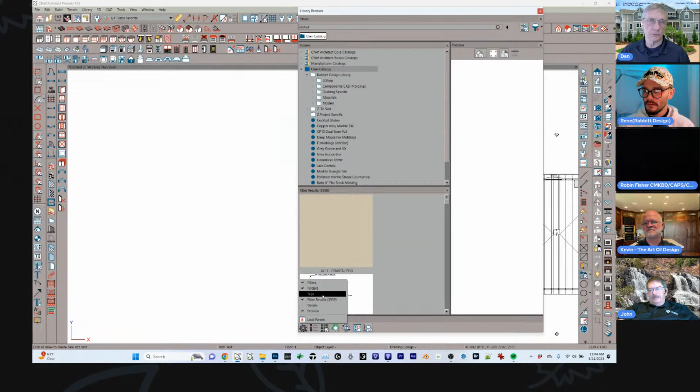Yeah, I guess that works, but I always encourage people to learn to use the new features. Right, but if you don't have the screen space, that doesn't really work either sometimes. Yeah, that's true, so when you're working off a laptop or something. So yep, all right, awesome.